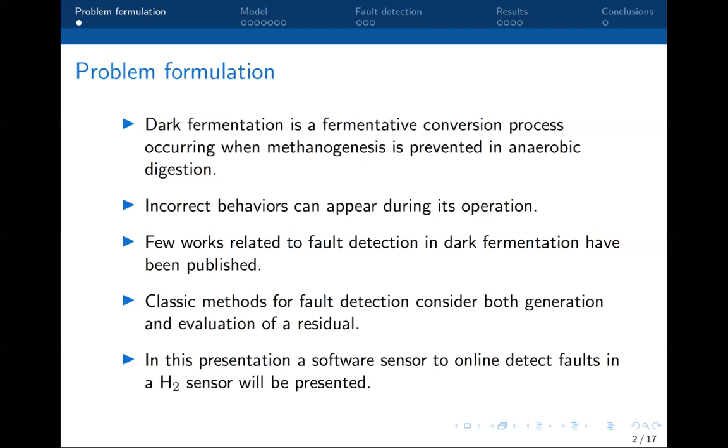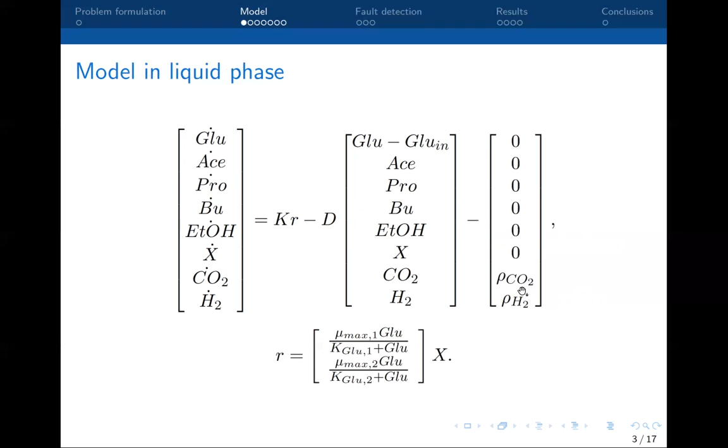The biohydrogen production dark fermenter is modeled in liquid phase by a set of 8 ordinary differential equations. The state vector includes the concentration of the glucose, the biomass, 4 volatile fatty acids, carbon dioxide, and hydrogen. The biological kinetics are modeled by 2 Monod-type reactions. The mass transfer from the liquid phase to the gas phase is modeled using the film theory.

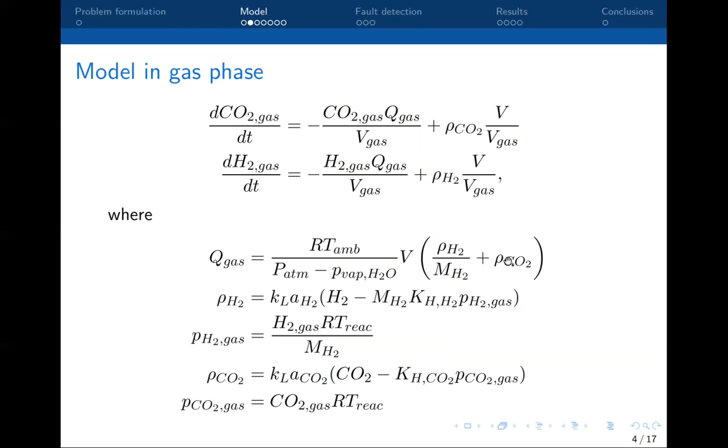In the gas phase, only the carbon dioxide and the hydrogen dissolved from the liquid phase are modeled by an ordinary differential equation, respectively. The total biogas produced is the sum of the carbon dioxide gas plus the hydrogen gas produced. The measured output is the hydrogen flow rate produced by the dark fermenter, defined in this equation. Nevertheless, in the case in which a fault occurs in the sensor, the measured output is complemented with a sensor fault function f sub s.

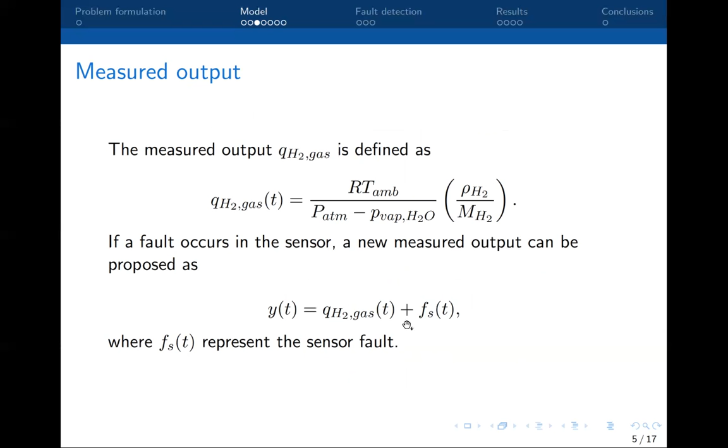The dynamics of the hydrogen flow rate are related to the concentrations of glucose, biomass, and hydrogen in both liquid phase and gas phase. The state vector set is therefore defined in this way. A 5-order nonlinear model is then proposed where the input flow rate is considered as control input and the inlet glucose concentration is considered as a disturbance.

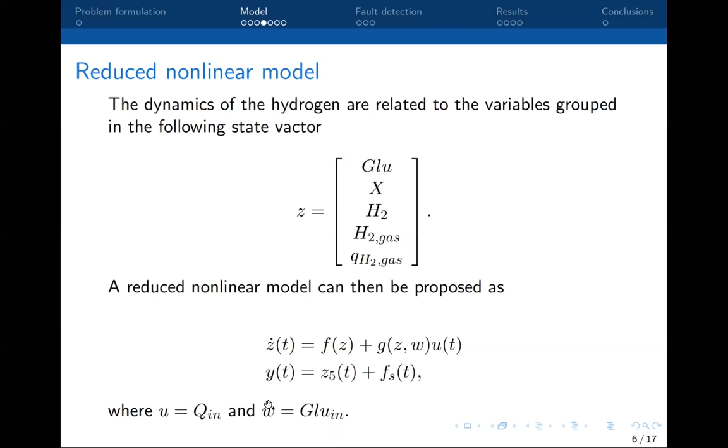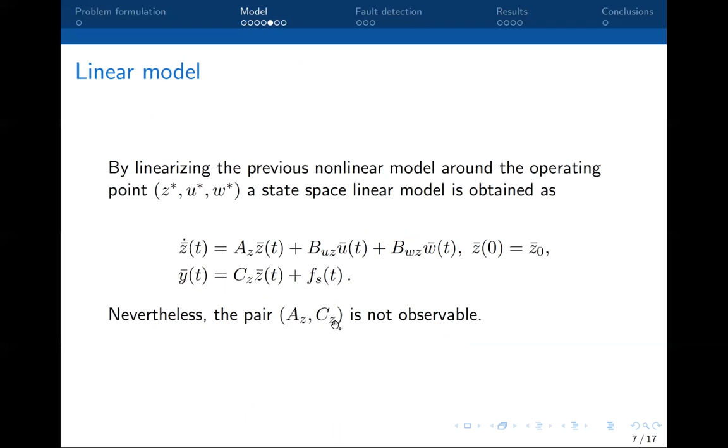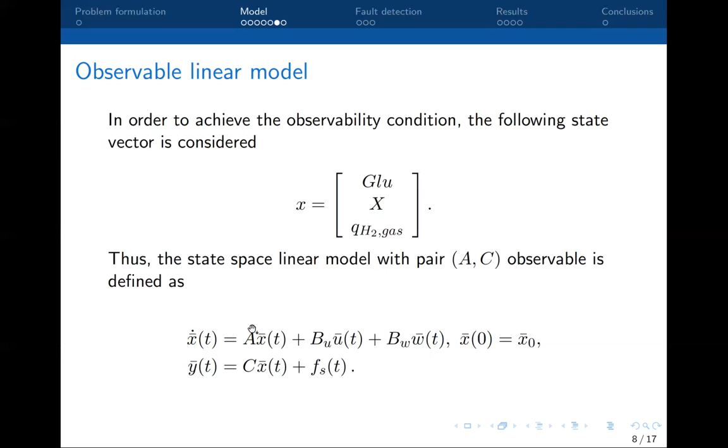By linearizing the previous nonlinear model, the following 5-order linear model is calculated. Nevertheless, since the state variables related to the hydrogen are linearly dependent, the pair A sub z, C sub z is not observable. In order to achieve the observability condition, a new state vector considering only the glucose and the biomass concentration as well as the hydrogen flow rate is proposed. Thus, in this way, a linear state space model with pair A, C observable is defined.

The dark fermenter model includes a set of uncertain parameters related to the hydrogen dynamics: environmental temperature, the hydrogen mass transfer coefficient, some pseudo-stoichiometric coefficients, the hydrogen mass, the maximum specific growth rate of the microorganisms, and the half saturation constant. These parameters are grouped in vector P. The environmental temperature is considered to vary between 278 Kelvin and 303 Kelvin, while the rest of the parameters are considered to vary between plus minus 10% of their nominal value.

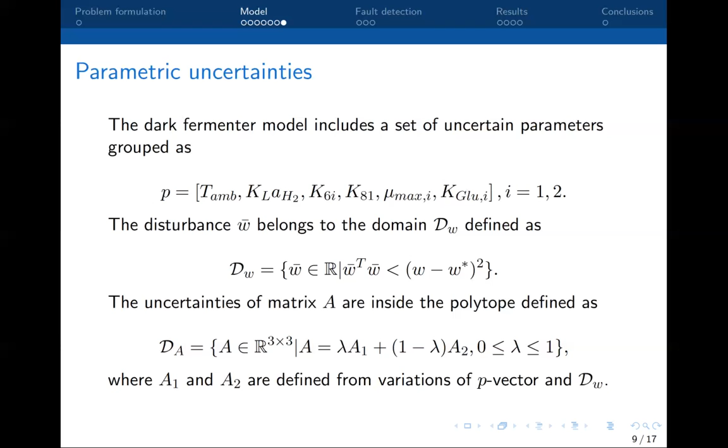W bar belongs to the domain D sub W for W star between 0 and 25 grams per liter. This way, the uncertainties of matrix A are inside a two vertices polytope. Each vertex is calculated from the minimum and the maximum variation of uncertainties of vector P and disturbance W bar, respectively.

The residual generator is therefore defined by a Luenberger observer here, with residual defined as the difference between the measured output and the estimated one here. In this residual generator, the observer gain L has to be designed. By defining the estimation error as the difference between the linearized state vector and the estimated linearized state vector, its dynamics are given by this ordinary differential equation. Of course, the residual depends on the estimation error.

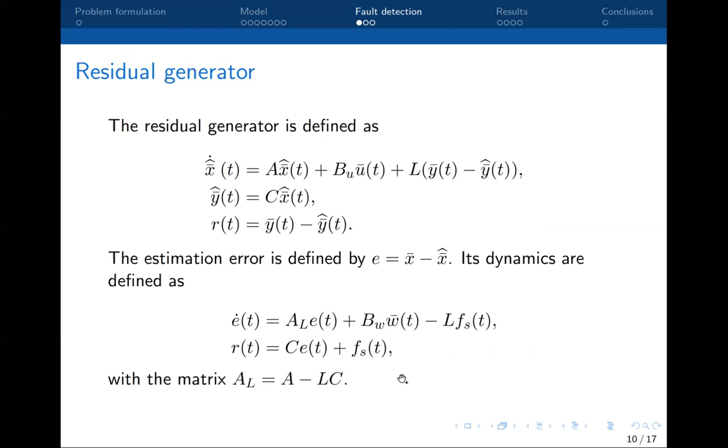In order to compute the observer gain L such that the convergence of the estimation error to a neighborhood of the origin is assured, even in presence of parametric uncertainties and the external disturbance, the H infinity norm of the transfer function matrix G is minimized by solving the following semi-definite optimization problem for each vertex of the polytope describing the uncertainties of matrix A.

In addition, the poles of the observer, the Luenberger observer, are placed inside the stability region formed by the intersection of a band described by this LMI, a circle centered in the origin described by this LMI, and a conic section described by this LMI.

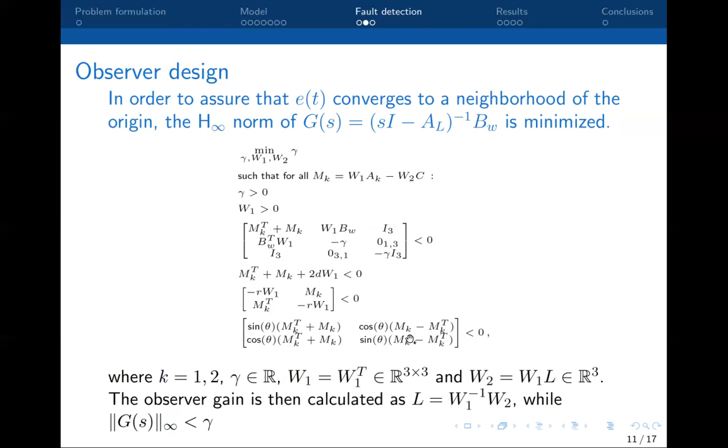Due to the effect of the input glucose concentration and the parametric uncertainties of the vector P on the dark fermenter dynamics, the residual generated by the Luenberger observer will not be exactly zero, even under a fault-free condition. Therefore, we consider the following residual evaluation function, which measures the average energy of the residual signal R over the time interval T minus delta T to T.

On the other hand, the fault detection threshold is defined as the product of the H infinity norm and the supremum average energy of the sum of the unknown input and the uncertainty effect. Thus, if the residual evaluation is larger than the fault detection threshold, then a sensor fault has occurred. Else, the hydrogen sensor is fault-free.

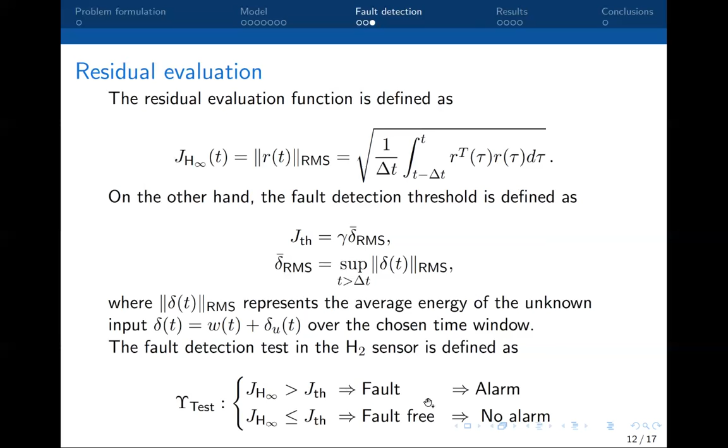In order to demonstrate the feasibility of the fault detection strategy, the residual generator was simulated in MATLAB. The measurements of the hydrogen flow rate and concentrations of the glucose and the biomass in the dark fermenter were computed by simulating the dark fermenter model. The semi-definite optimization problem was solved using CVX with the SDPT3 solver. The ordinary differential equations were solved by using the stiff solver ODE15s.

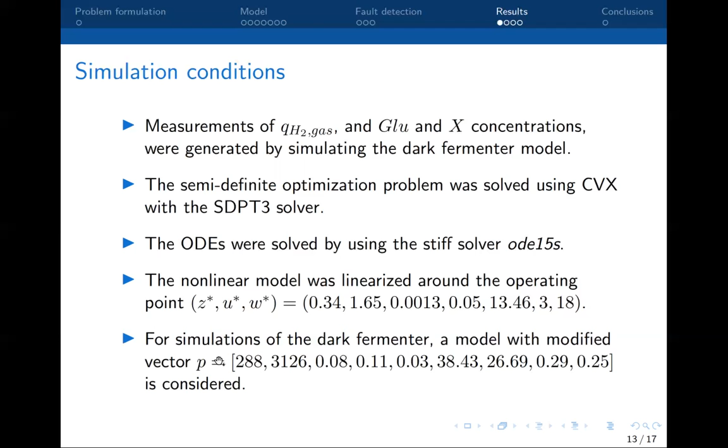The reduced nonlinear model of the dark fermenter was linearized around the following operating point. To simulate the dark fermenter, the following vector P modified was considered. For simulations, inputs during 64 days from a previous work were considered. As mentioned before, the input flow rate is a control input, while the inlet glucose concentration is an unknown input.

Three scenarios were conducted for the validation of the fault detection observer. The first one considers the case with a noise variation of 1% on the hydrogen sensor. The second scenario considers a noise variation of 10% on the measured output. In a third case, a noise variation of 1% plus an offset of 25% are considered.

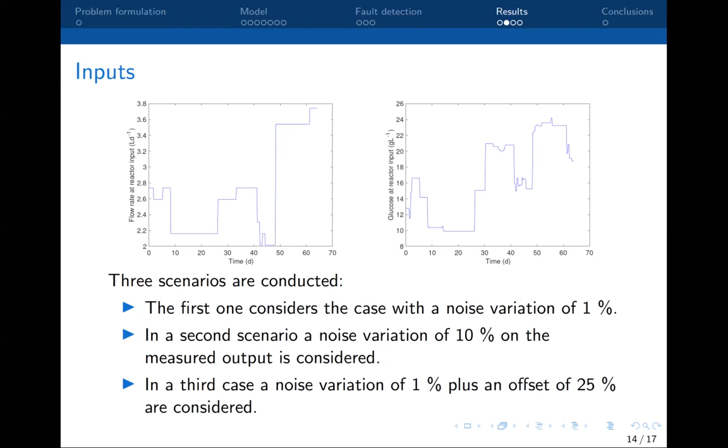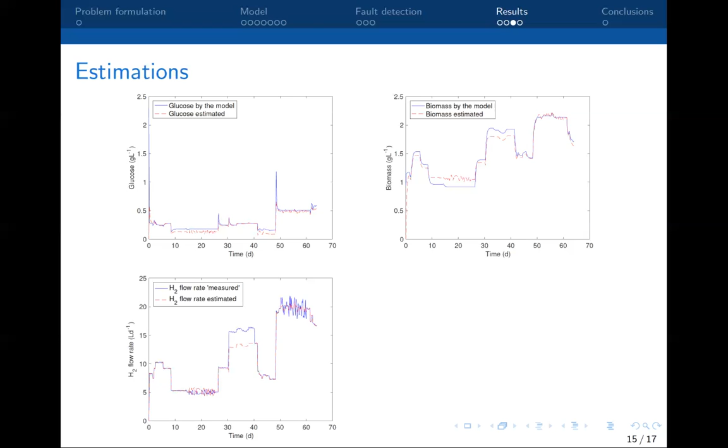On the other hand, as can be regarded in the evolution of the glucose and the biomass concentrations in the dark fermenter, both estimations remain close to the concentrations by the model all along the simulation, demonstrating the robustness of the observer design.

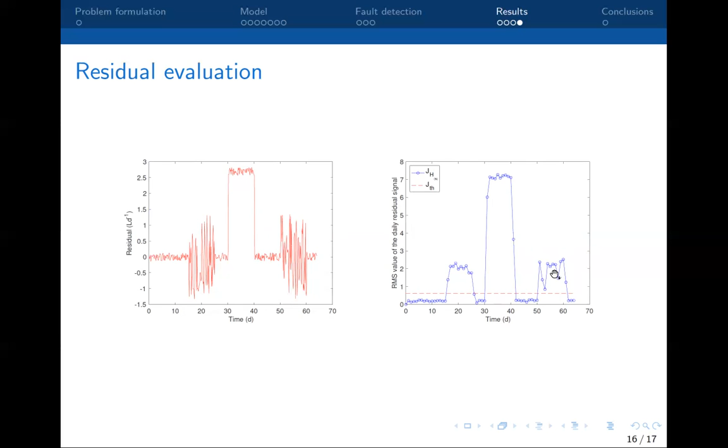As conclusion, simulations showed that the observer is able to correctly detect faults in the hydrogen flow rate sensor and estimate the concentrations in the dark fermenter. The fault detection strategy proposed is robust against parametric uncertainties and an external disturbance.